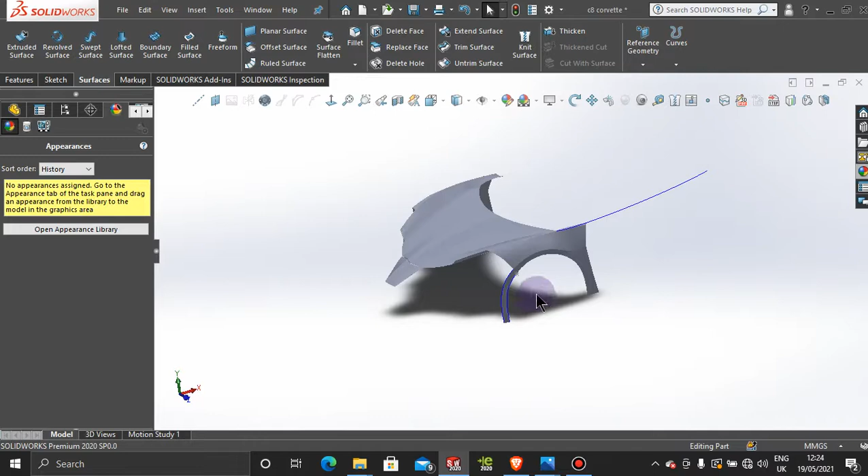In the last tutorial, we created this section here. In this tutorial, we are going to create a water line that goes all the way to the edge here. From that water line, we're going to be able to create this triangular shape all the way down to this point, to this edge.

From this edge, it's going to be very easy to work on these surfaces, and then get it mirrored over to the other end, get the front splitter done, and then moving up to the top part, create a logo, and then we will get to the headlight at the end when we are at the front part of the vehicle.

So let's jump into Solid here and get rid of some lines. Hide this line here, hide this line here, and then jump down to here and find that point. Just hide that one as well so everything's out of the way. There's no points here showing up.

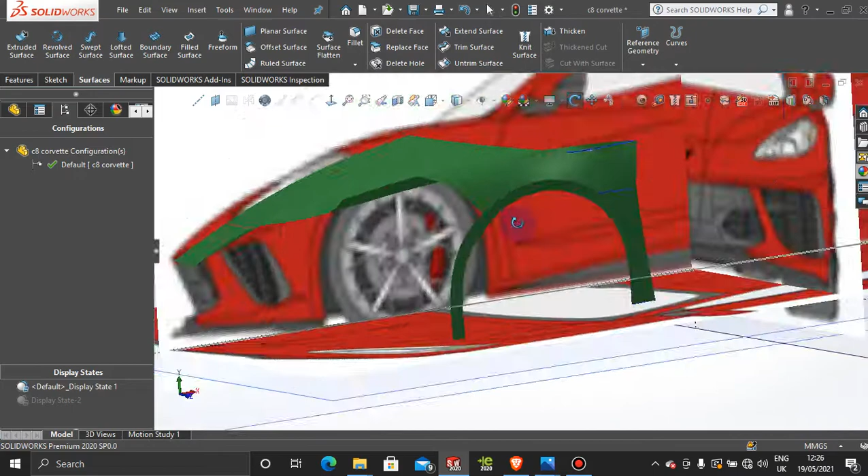So the first sketch we're going to create is, let's have a look. Let's hide these lines here as well. So the first sketch we're going to create, press spacebar.

We're going to grab a 3D spline going from this point to this corner here. But first we have to determine this point here. So to do that,

Let's have a look at a picture here, and let's minimize this picture. Let's minimize this picture here, something like that. It stays with us in Solid, hopefully.

Okay, right. So that line, basically we have that one here, and then that line starts from about here, and it bleeds in and flashes right about there. So we need a point here.

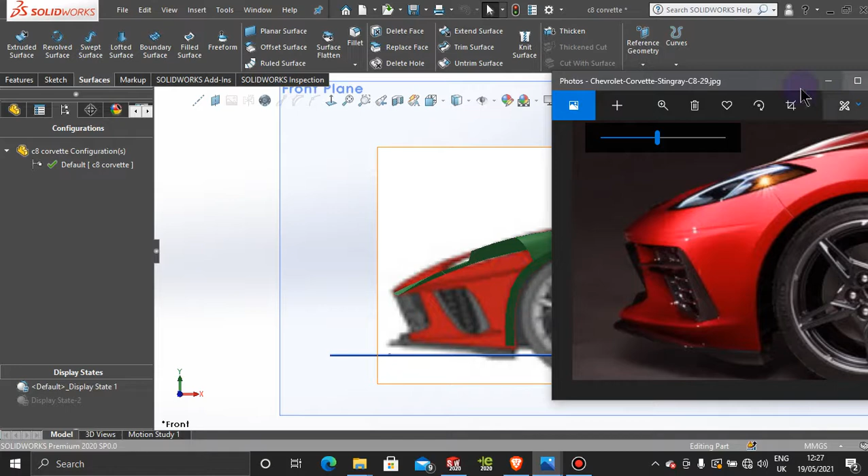So let's make a sketch on the front plane first, and let's add a point here. You can move this point around. Let's put it somewhere here. Roughly.

Let's have a look at that picture again. Yeah, so that's going to be perfect over there.

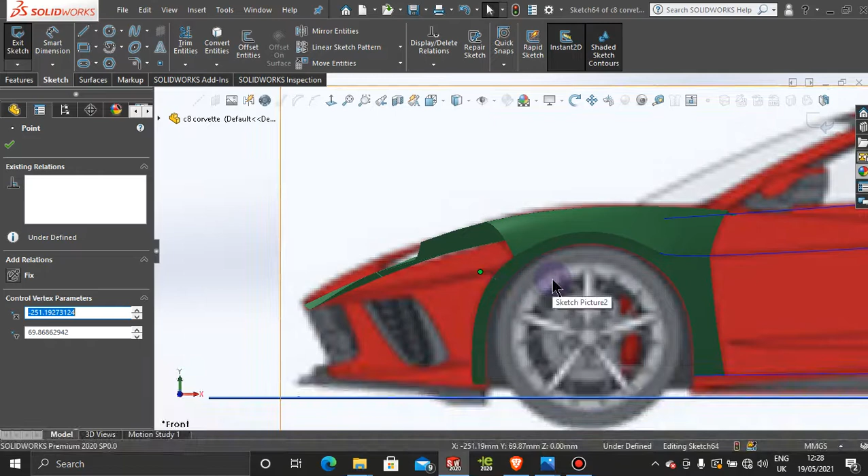And then next thing we're going to do is turn the whole thing this way.

Okay, and then we're going to exit this point sketch and grab onto our 3D sketch, and that is going to be a construction line from this point.

So just press tab to change from X to Y and Z. Okay, so we're just going to pull it out straight to about here.

So that's good. And then let's press spacebar, and then let's pull that line where we want it to be. All right.

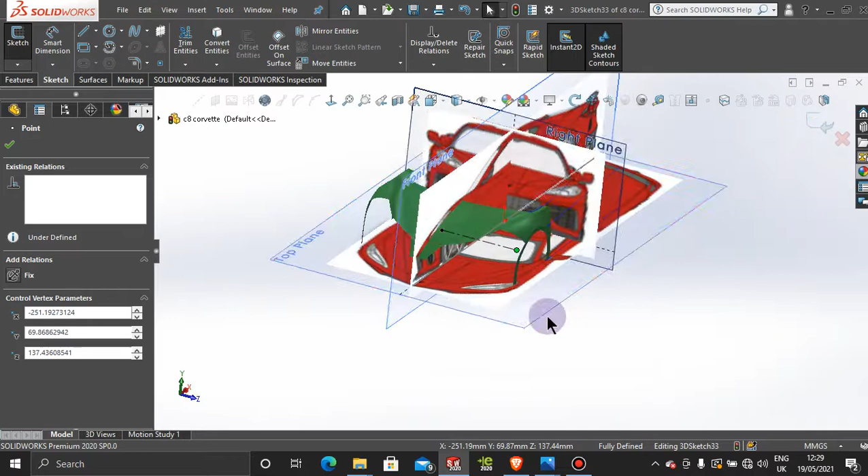Okay, so basically let's jump into our picture here for a second. And once we have that point, let's jump in here and have a look at some of our pictures.

Right, so that point comes in a little bit to be able to create that little bit of flange here, which comes down and then bleeds all together. Okay, so let's do that.

Let's come from the top plane here. Just click the plane and then normal to profile. And that's the edge of our surface, and then

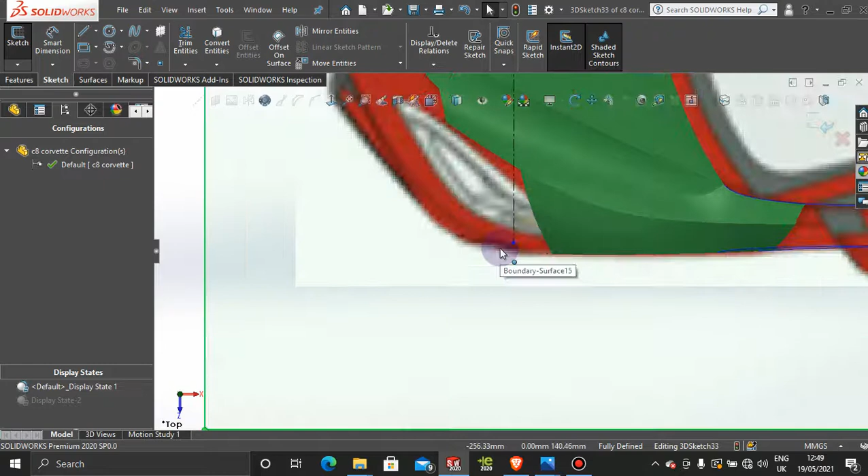Obviously the line will come from here, and it will just bleed into that. So maybe let's bring it a little bit more up, just a tiny bit, about that much. And then once we have our line that comes over here, we do a tangent relationship.

Okay, so now that we have that point determined, let's go and let's add a 3D

3D sketch of our first water line, which is going to be from this edge all the way up to that edge, so this upper corner here, and then

We create the other sketch after. Yeah, so we're going to create this line here, and then we're going to create another line. It comes from the same point, and then drops out. Let's zoom in a little bit.

Hold on a second. Yes, so once we have that point there, what we're going to do is get this first upper edge here.

Let's get that by creating a 3D sketch. So, 3D sketch, spline. And then we're gonna go from this corner here, and we're just gonna go all the way up to this point.

And then we will create a small tangency to that area there. But first let's fix that line here. So let's click on top plane and normal to profile. Let me see if it's still recording. Yes, we are. Let's get the line.

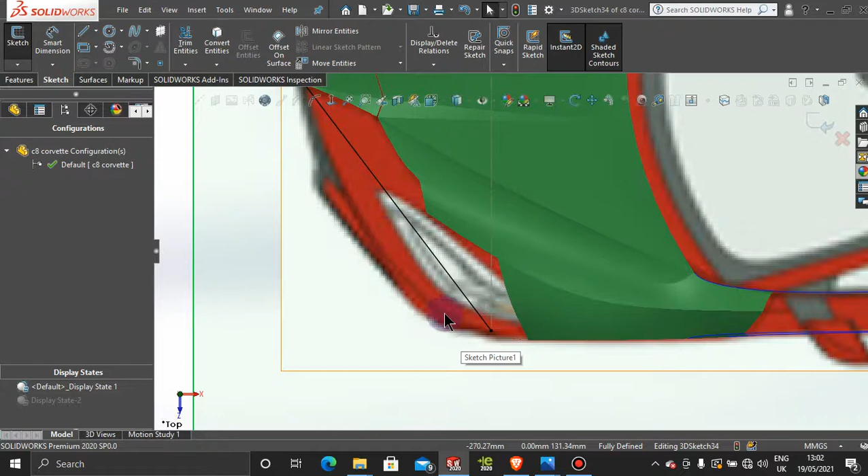So the first one is going to be this line here, not this outer one. That's going to be in here, this line here. We might even actually add a spline point as well. So let's pull it out to here, and then here. Let's pull this to the edge.

And let's add a tangency from this edge to this line. Hold control and then make tangent. Press OK. So now that is the tangent curve. And let's have a look at our spline here, which is looking good.

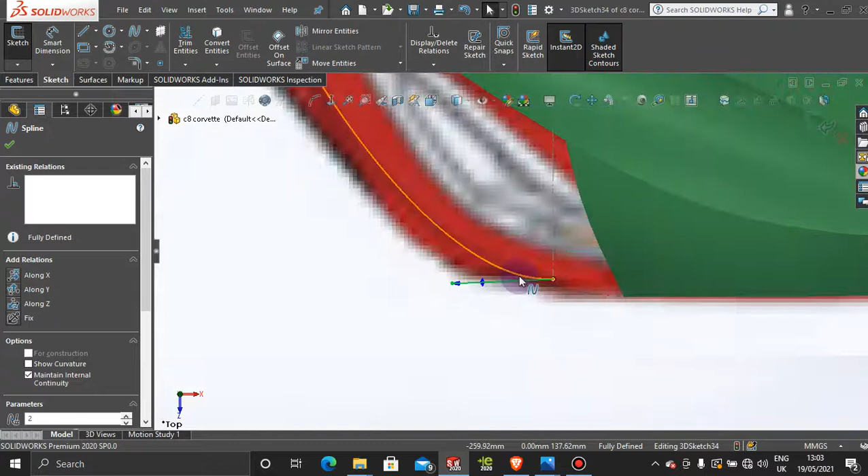Maybe going a little bit more like that. Okay, so that looks good. Let's have a look at the picture. Okay, so that's something like that. Yep, that looks very good.

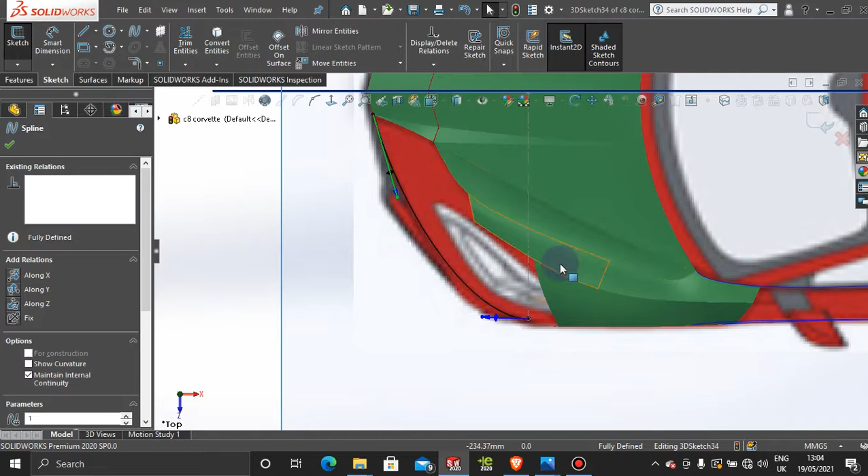Maybe we can go in a little, just a tiny bit more, and then let's see. Yeah, perfect. So yeah, just manipulate it as far as you're satisfied with that curvature.

Let's go from the... let's have a look at from the side. So front plane, normal to profile, and let's bring that line up. Actually, let's get that. Let's get the tangency out. Delete now.

Okay, so we can get to our curvature as it should look. Something like that. Okay.

Let's have a look at our picture. Which picture should we use? This is the picture we want. Okay, let it load up. Okay, it's a very high resolution picture actually. I'll come out here and bring the picture back.

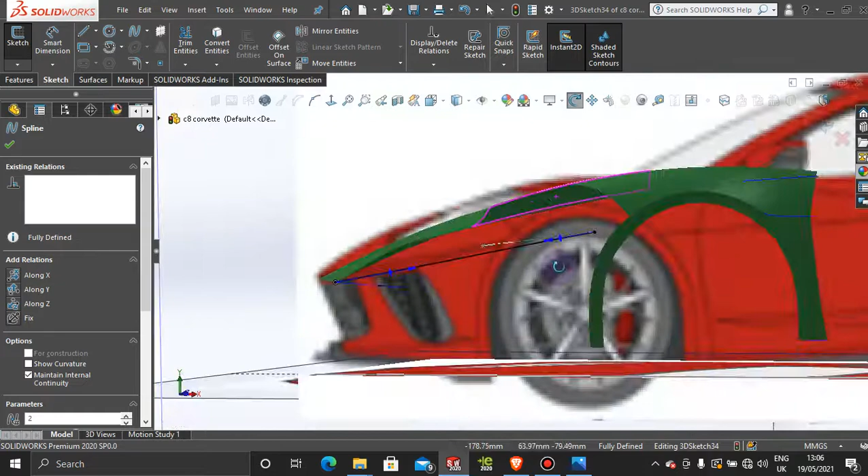Now let's come to the top view, to the front view here, and click on that and press normal to profile, and jump in here real quick. And then let's just bring it to where we want it to be.

Next thing is click on the picture here and bring the picture down to about there. Don't worry about it, you can bring it down. As we're not really going after the blueprint, we're more going after the pictures that we have, so having this picture sitting here is a much better option.

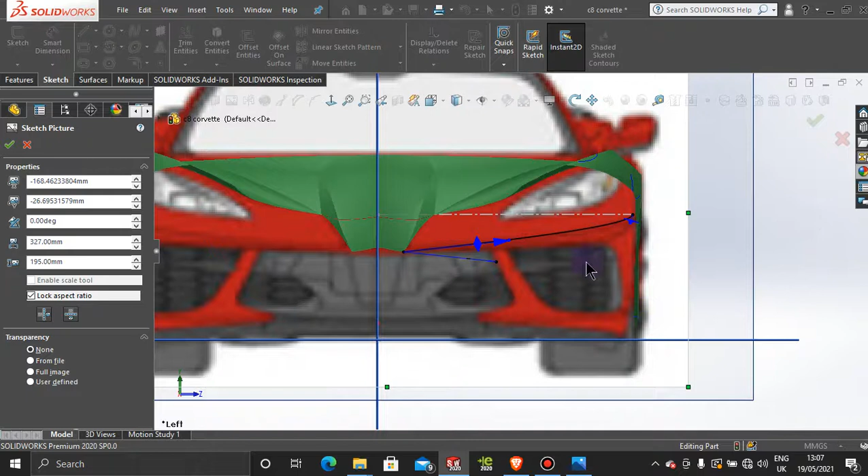Okay, so let's come in here again and then see that curvature, and then let's exit that, and then let's just see this line here, and then see this handle, and I would say that's a good curvature from this view.

All right, so let's have a look again from the top view just to make sure that everything is in line and as it should be. And let's have a look from the front. Normal to profile. That still looks good. That's good.

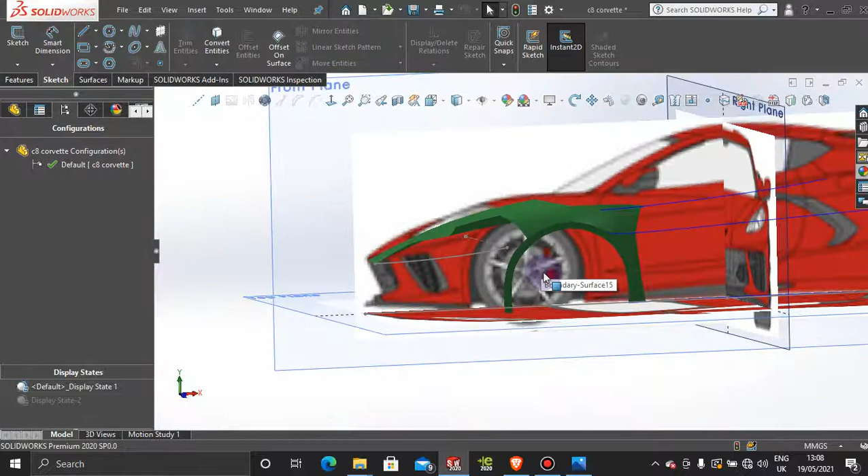Okay, and then now let's add our 3D spline here, and that 3D spline is going to go from here straight all the way up to this point here. So let's go to 3D sketch and then grab a spline, and then we're gonna go from this point to this point here, exit the sketch, and then we want to be tangent with this line here. Let's make that tangent. Actually, you don't need to be very straight.

Let's go back again to 3D sketch, add the spline back from this point to that point. Well, not there actually, let's delete that, and edit from here. So spline from this point to that point, and let's click on this line, hold control, click on this line and make tangent. Yes, now we're tangent.

Okay, and then let's come from the top plane here, and let's click on this line and just take a little bit off from the tangency in this area. Let's have a look at the picture, how much tangency we have on that one. Not much, it's pretty straight, so that would probably be enough.

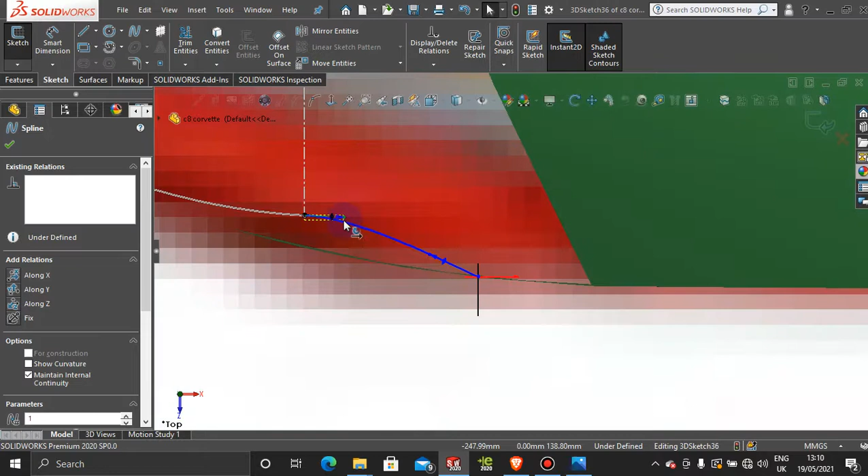So if we pull it down a little bit, bring that up over here, and of course we can always change that sketch if we're not happy with it. Okay, so let's keep it as it is on this sketch.

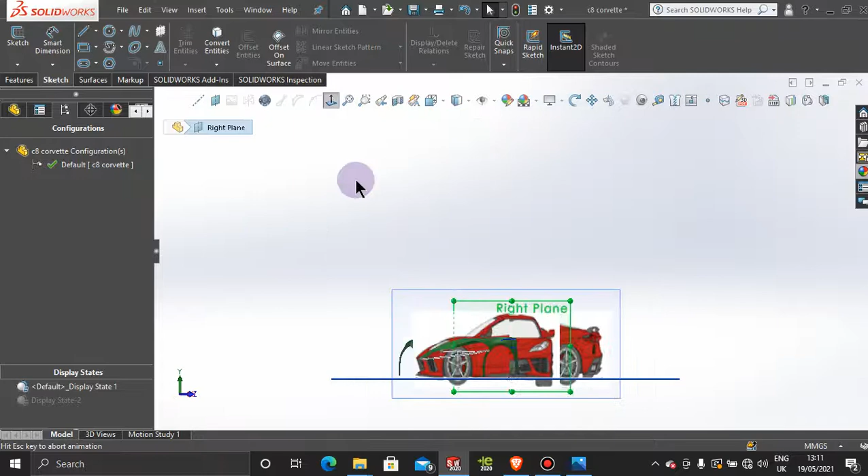And then exit this sketch, and let's create our second sketch. Let's come to the right plane here, just click on it, normal to profile, and then we're going to grab a 3D sketch construction line, and come from this line straight down to about there.

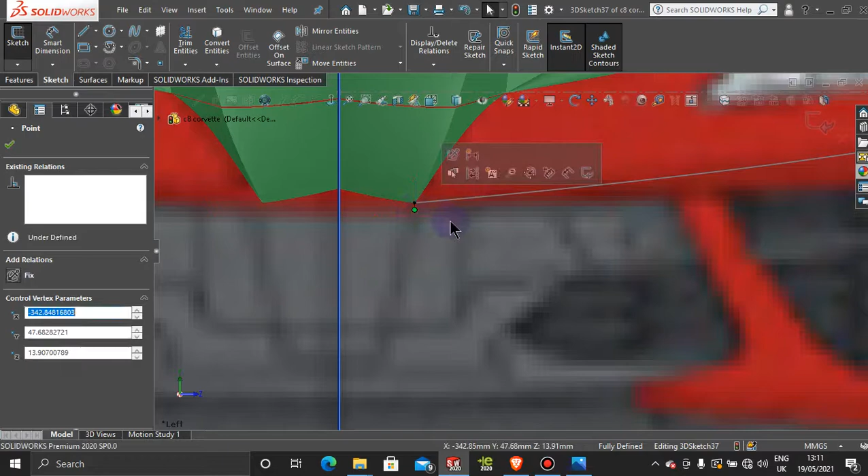And then yeah, let's bring it a little bit more up. Don't need too much on that one. Okay, so that's the first one.

Okay, and let's have a look at the picture again, and then our second sketch. I would say we're going to do the same thing on the second sketch. So we're gonna come over here from the right plane, and this is our line that we determined, and then we're going to exit the sketch.

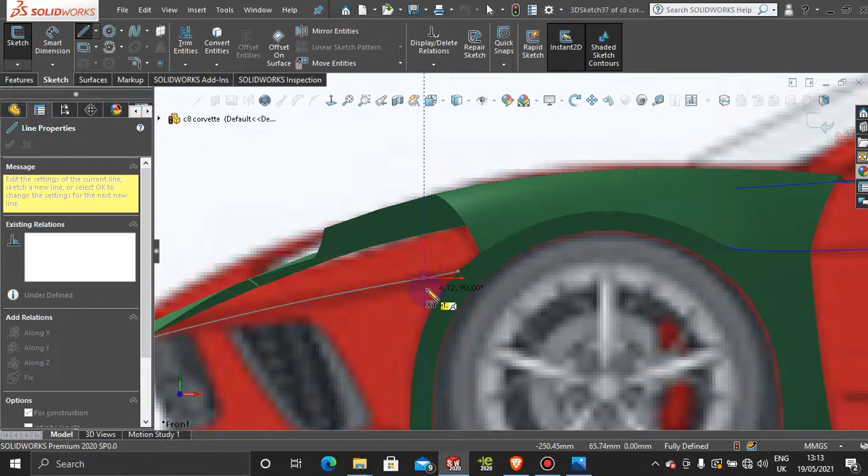And then let's grab another 3D sketch with a construction line, and we want to snap on that point, just press space bar, and then Control Z to get the line off. So let's grab that construction line, and we're gonna come down to about that much. Of course, we put it there.

Okay, so again, let's grab a center line, and then we wanna be on the XY plane. XY plane, that's fine.

And let's measure these lines here. I want to make this water line the same size all the way around, so let's grab the measure tool, and that's what this measurement is, 1.27 millimeter. Parameters 1.27, let's make it this one. Let's try 2, or let's try 1.5. 1.5 looks a lot better.

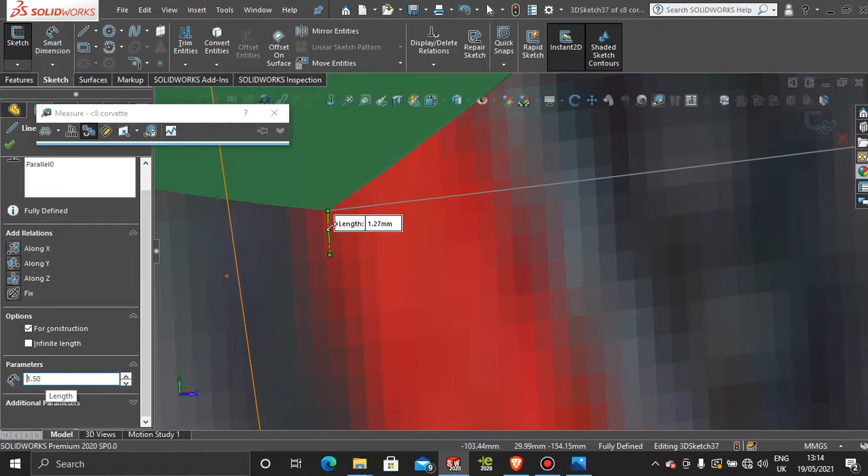And then let's measure this one here, and exit this measure tool, then jump back into the measure tool, measure this one. This one is a lot longer, so 1.5 on this one as well.

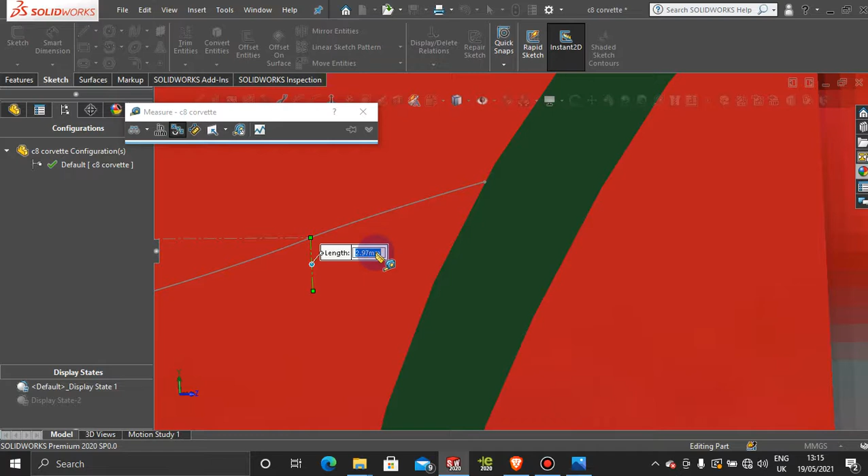Okay, we're gonna keep it as it is, and then see what we can do with this next spline that we're going to create.

Okay, so let's grab again our 3D sketch, and that's going to be a 3D spline, and we're gonna come from this point to this point here, and then the same thing basically what we did on the other one, except this one is going to be a little bit different.

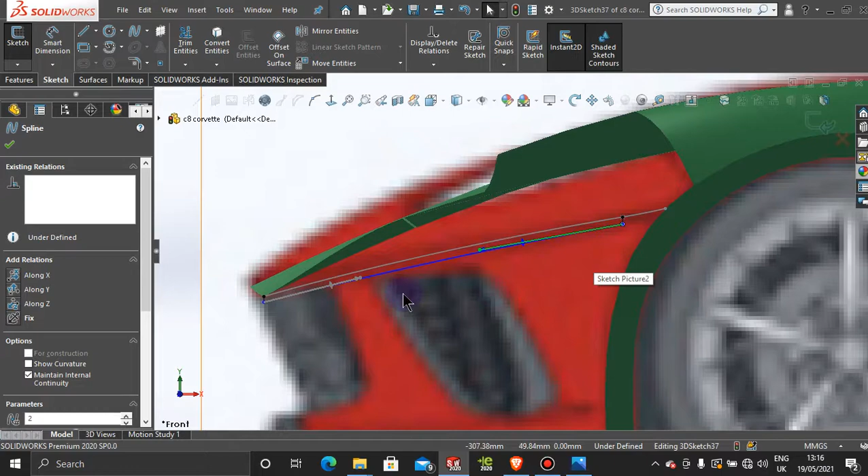So let's give this a nice profile close to the other one that we created. I'll bring this line a little bit up, something like that, and then let's try to be on the same curvature as that one. Okay, and now let's come from the top here.

So as long as you're in the 3D sketch, and you're just turning the model around, you can manipulate your curvature. So our next curvature is going to be flush with this one, but then it pops out here and comes in here as on the picture, as you can see. This is the pop out that we are looking for. It pops out, but starts to get flush at this point.

Let me bring up this picture here. Let's bring up this picture. Okay, so let's zoom in on the front of it.

Yeah, so it pops out a little bit. As you can see, it starts to get flush here, and then it pops out and comes in. All right, so let's go after that one.

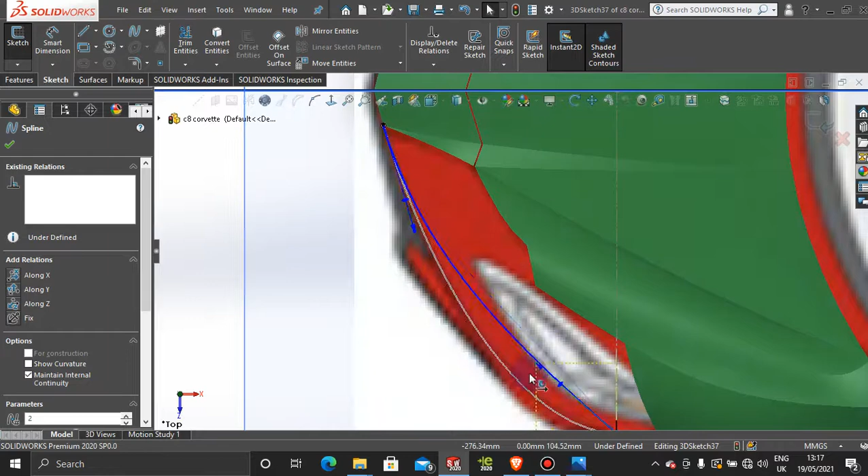So let's click on the spline so we can have these handlebars, and then bring them how we want them to be. It pops out here and stays flush on this edge here.

We need to add a spline point somewhere around here. So let's add that spline point. Insert spline point, and let's add the spline point here. Okay, exit the spline point and click on the empty field, then click on the spline again and press display control polygon.

And now we have all these four connectors that we can work with. So let's pull this out to about here and pull this down here. As I said before, it's flush with the other one, and it starts to pop out from the flush right about there. We just make sure that we manipulate this one as it should.

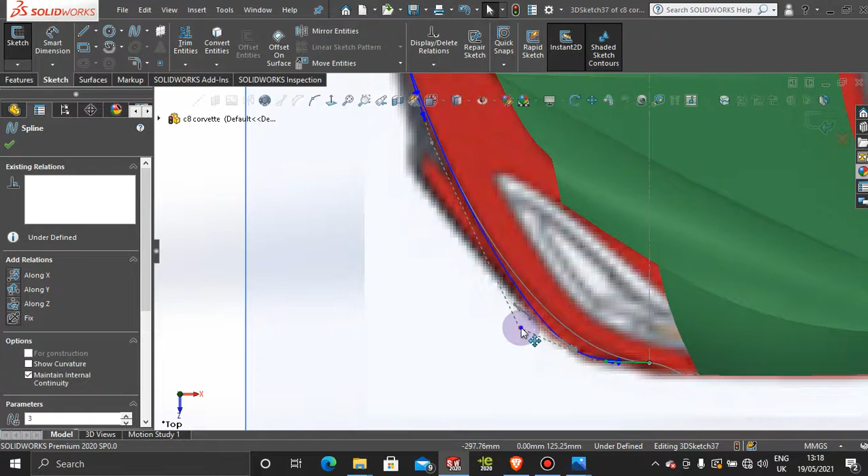Let's bring it a little bit more, and then okay, let's go back to that one here and bring this down a little bit here and here. So yeah, it's flush and it's starting to pop out right about that point.

Okay, so that looks good from there. And now let's just double check from the front plane, normal to profile, and it's not flush as you can see.

So let's grab on those connectors that we have, these yellow triangles, and make sure that our spline is tangent to the other spline.

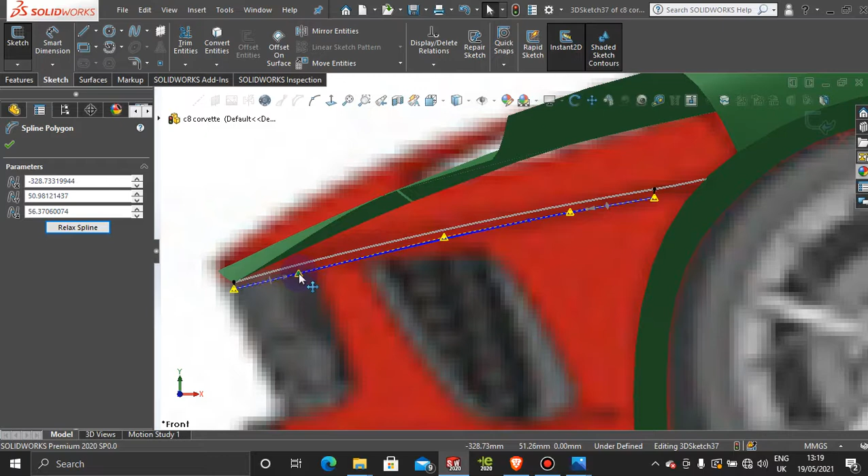Don't worry if the blueprint is not coexisting with the spline, because we're going after a picture and we can move around our blueprint. So something like that. You can always use curvature combs to get this as straight as possible.

Okay, that looks good. And then let's have a look from the front. So there's a few ways you can move around your object. Either you press space bar and hold middle mouse button down, and you can have all these views, or you can just click on a plane and normal to profile, and it drops you where you need to be.

Okay, so let's have a look again from the top. Basically, double, triple checking is always the best, because then you know for sure that your spline is how you want it. As you can see, it's not flush here, it goes below that one.

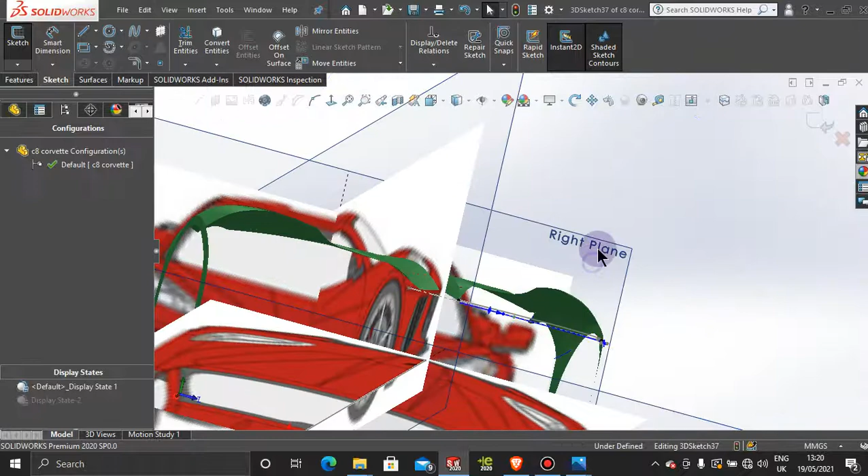That's okay, so now that's fixed, much better. Let's have a look from the front, from the top. Top looks good. Let's have a look from the front here, normal to profile, flip that around, and then that looks good on that section as well.

Okay, so after that one, let's exit the sketch. Okay, and then have a look at our picture here. As you can see, this corner here, when it gets to this end here, it gets quite close to each other. So we're gonna go with something like that.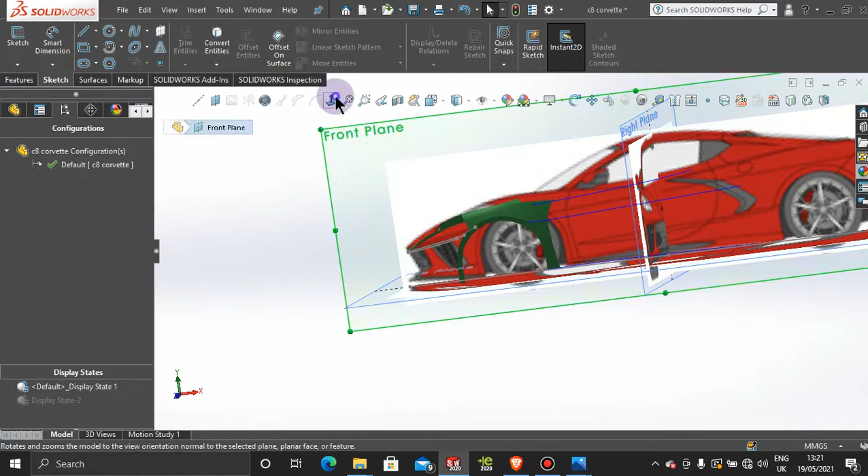Okay, so let's jump into the front plane here, exit the sketch, front plane, normal to profile, and let's bring that line up a little bit so it's closer to that one.

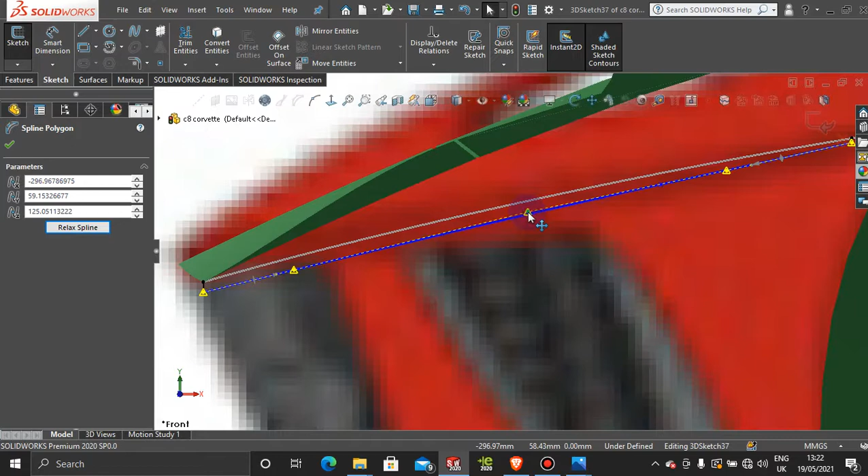But now we have to fix up our curvature. So again, just fix up the curvature as much as possible as you can. Play with it as much as you want. I mean, when it comes to surfacing, surface design, you're going to play with curves a lot, because the curves are determining your surfaces. So it's important to get them as good as possible.

Again, let's have a look from the front. Just a tiny bit up. That looks good. And now let's have a look from the top. And that looks perfect. Okay, so yeah, of course.

So the next thing we need to do is create this curvature here. So let's grab a separate 3D sketch. It's going to be a 3D spline, and we're gonna go from here, from there up to this point here, that edge.

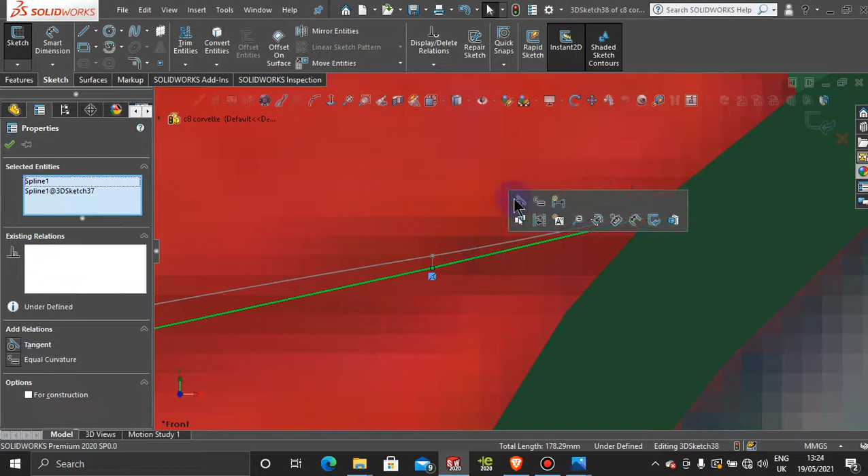Okay, so let's have a look from the side view, and then we're going to add a tangency. Hold control, press that one, press tangent. Okay, and then that looks pretty good to me.

And then if you look at, let's look from the top, and we just need to pull it to where the other one is.

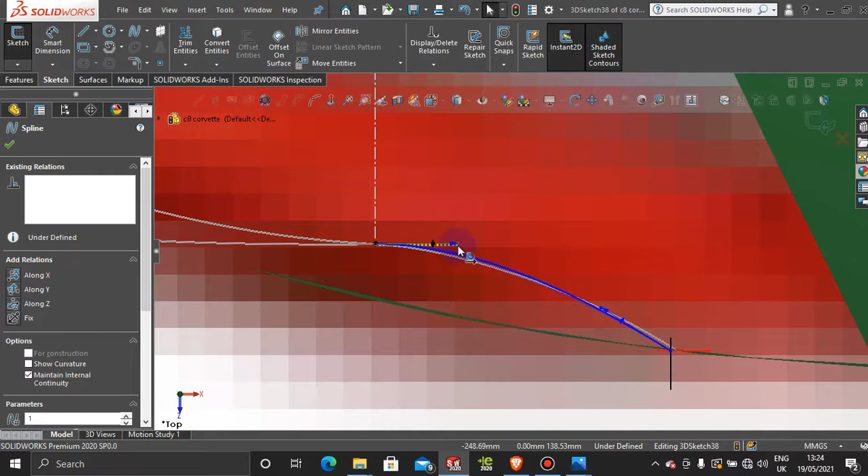Get there, something like that. Pull this a little bit out, somewhere in the middle. Okay, that looks good.

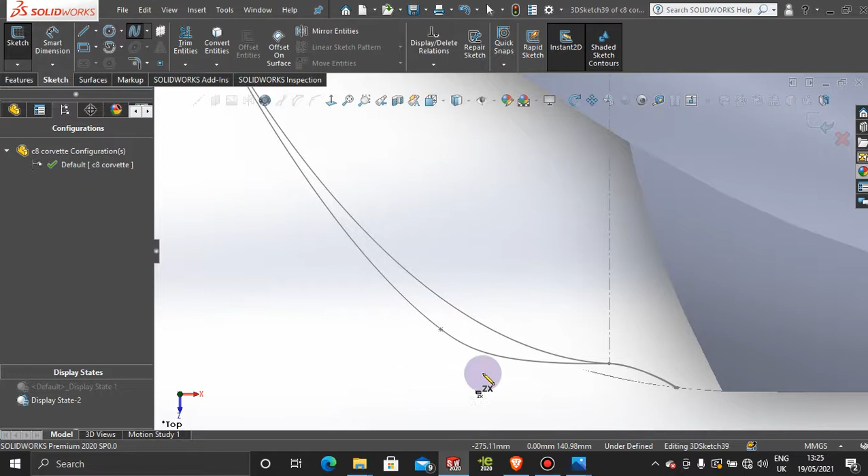So exit the sketch. Now basically what we want to do is jump over our second display state here, and then add a 3D spline. Let's go from the top, and we're going to add a 3D spline from this corner, from the straight, the widest point inwards. So let's go to 3D sketch and grab that spline, and go from this corner all the way to this edge.

So let's jump in here and manipulate that spline that we just made. The best way is to jump to the back view here, turn it around, and get to that spline in the best possible way so it's straight. I would say this is our straightest point. Maybe if we get the connectors of the spline hitting the edge, we get a better spline, moving things up or down.

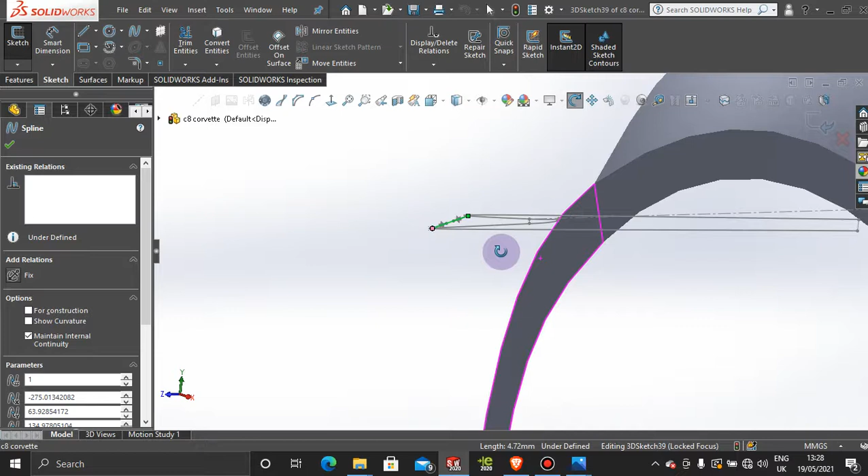If you get it somewhere in the middle, okay, then click on this spline here, and as we said, let's just turn a bit. Yes, now we're okay. Oh, hold on a second. So we want to be in the middle as much as we can on that section, and we want to get those two points to be at the very edge. It depends how good your mouse is — I lost my trackball mouse, but a trackball mouse is usually the best. Okay, that's maybe the best we can do here right now.

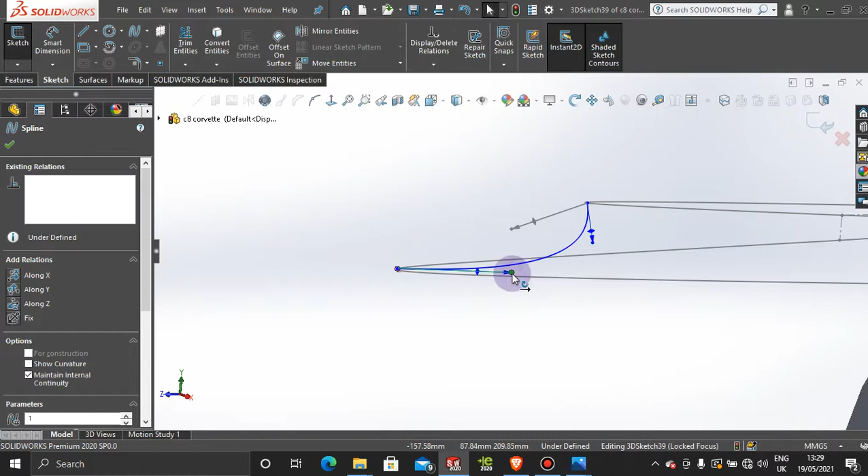So as we said, we have a straight line coming in from this angle, and we have a curvature in this area, as you can see. So that curvature, something like that, and then a straight in. We could add a spline point here, but that would make it very sharp, and there's not much sharpness there. Let's pull in a little bit more and get flush with that, so we make sure we're not falling below that one, those two lines.

Okay, that looks good to me, so that's going to be our first profile. And as we talked about, it straightens out somewhere about here.

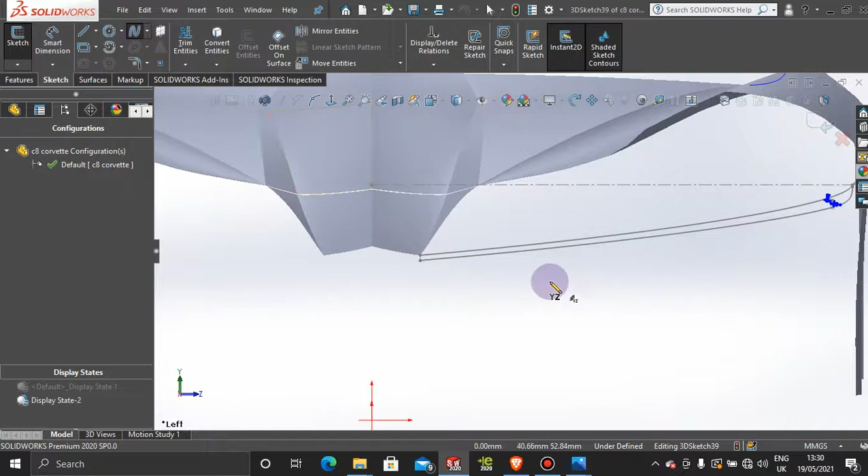So we're just going to press spacebar, get to the front of this whole thing, and grab a spline. And then we're going to grab a spline from here to here, and add a little bit of profile to this one, just so that we don't have any warpage. Just a tiny bit — that's about it, okay, that's good.

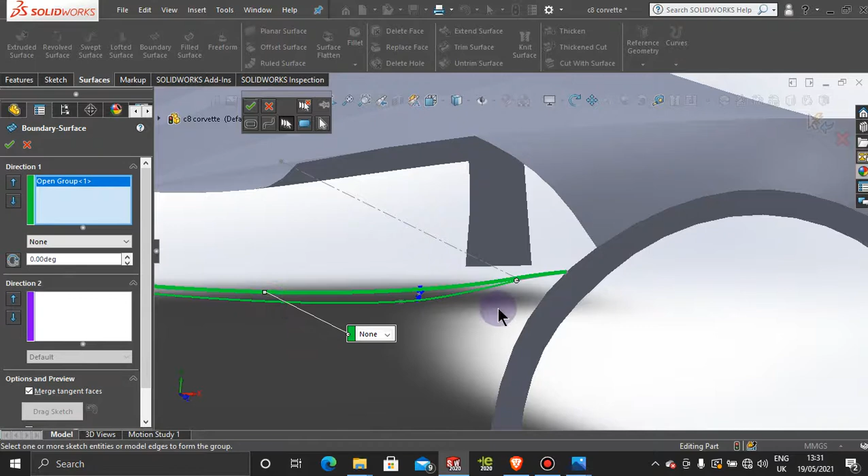And then now we're going to try and do a surface, a boundary surface. So let's grab the selection manager with the right click and select this line and this line, then press OK. And then again, selection manager, select this line and then this line, press OK. And then let's flip these connectors — stay on one of these connectors and say flip connectors. Okay, so now we have the surface there.

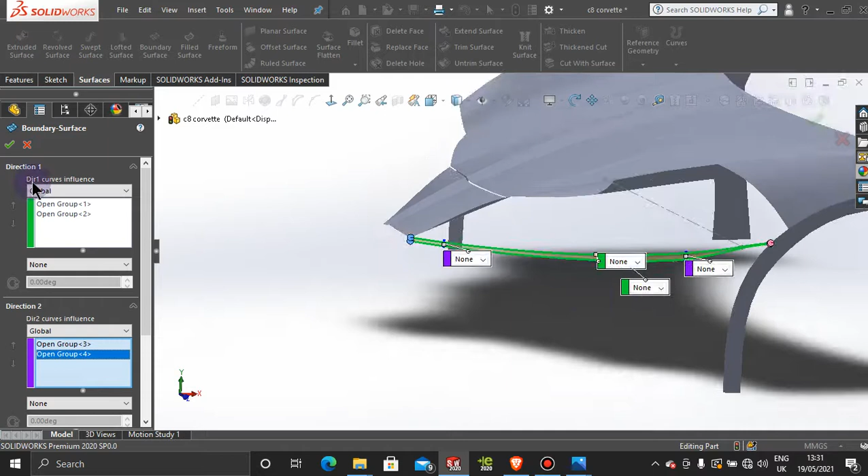So all we have to do now is add our profiles. Direction 2 is going to be our profile number 1. And then another direction here, so the curvature doesn't go all the way to the end — it's going to be this profile here. I straightened it out, and it starts to curve in at this point. Okay, press OK on this one and see what surface we have. Our surface looks good. Let's have a look from the top.

That looks pretty good. Okay, come in here and have a look what we have here. That's touching where it should be, touching its course, that water line.

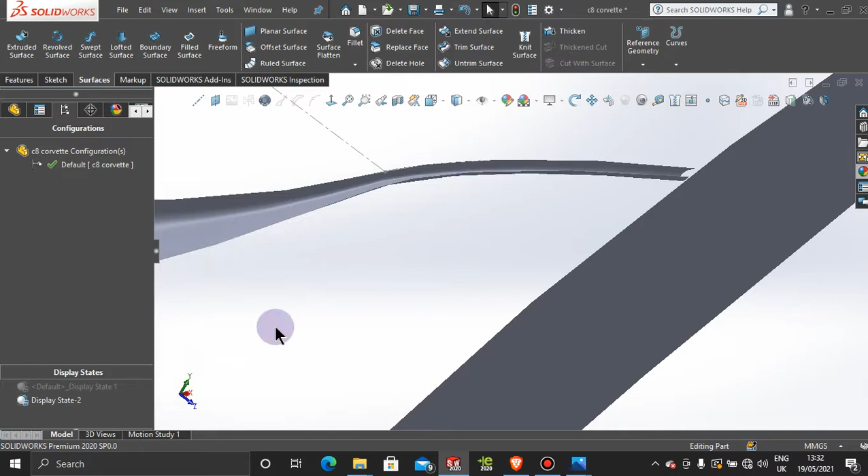So let's help that. Let's delete this boundary surface here and go to our sketch. Let's create a separate sketch from the side view here.

We want to straighten it out somewhere around here, so let's go to a 3D sketch. Let's grab a spline, grab it from here to here, and then let's add this small spline, a little bit of profile as well.

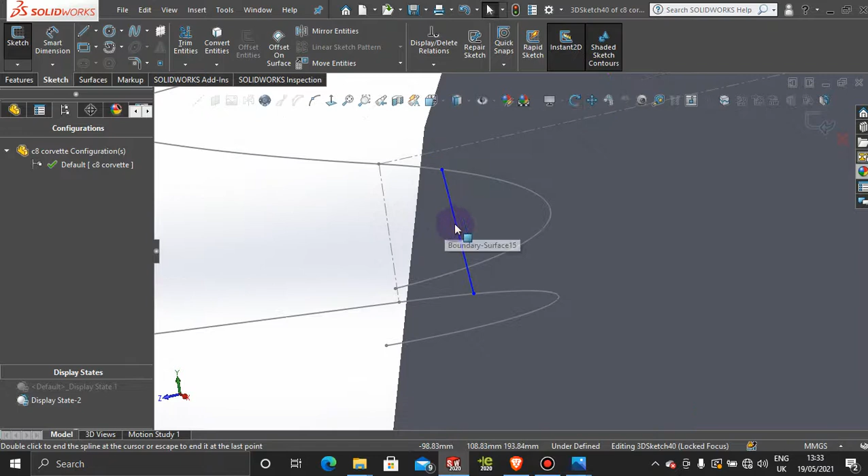We're going to bring it inwards, something like that. Okay, so now let's have a look what surface we get this time.

Exit the sketch, then go to surface, boundary surface, selection manager. Let's choose this spline. Press OK. Selection manager again with the right click.

Select this line and this line. Press OK. Hover over one of these connectors, right click, and flip the connectors.

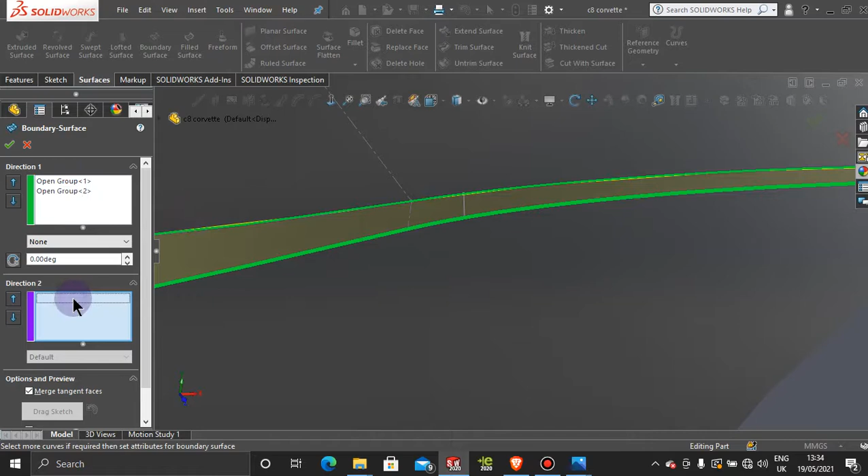Our direction 2, the first one is going to be this one here, the second one is going to be this one here, and then our third one is going to be this one here.

Press OK on that one, and I want to see if this one registered. Spline here, it did. Press OK on that, and now we have a lot better surface to work with.

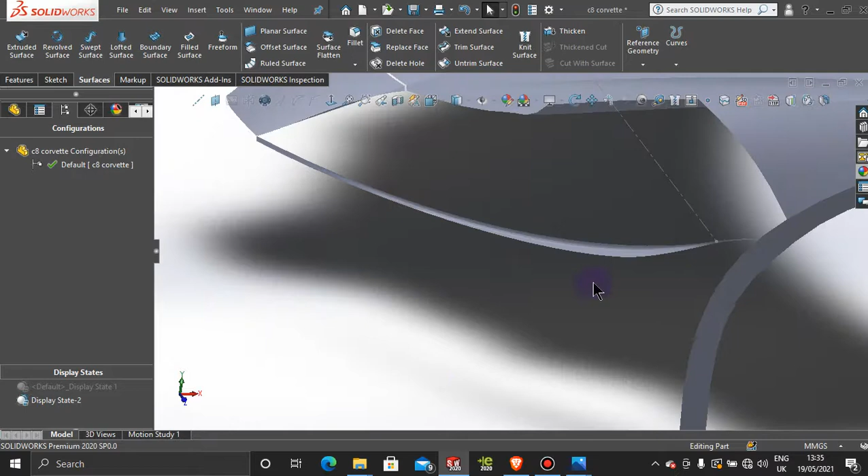Our curvature does stop there, bends in here, and then stops at this edge, so we can knit everything together as we should. However, we can maybe make this straighter, so we'll see how we get with that one.

We're going to create from this corner here all the way up to this corner, which wraps around into that small surface here that comes in and out. But first we have to determine this point here. Okay, so let's do that.

Before we go any further, make sure you save. Let me have a look—it's still recording. Yes, we are. Okay, let's bring in the first display state here quickly.

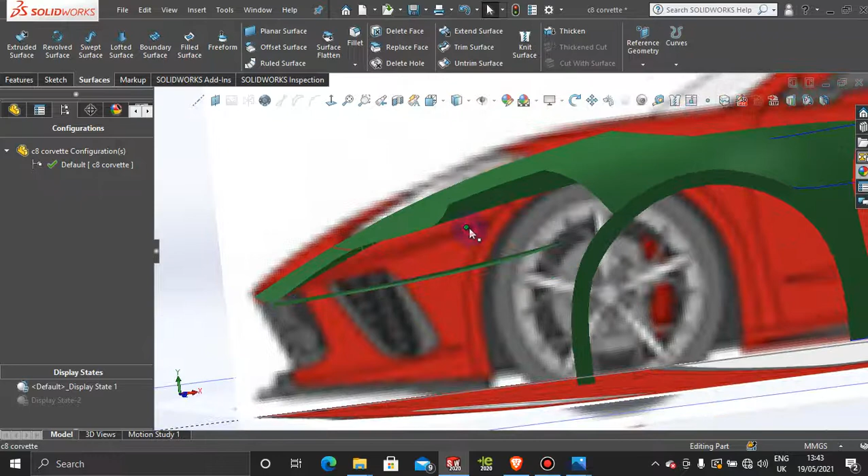Let's just hide some sketches that we're not using, so let's hide that one as well. All right, that's good. Now we need to determine that point.

So let's make a sketch on the front plane, normal to profile. And then we're going to make a sketch here.

Grab a spline and sketch from here to here, then bring the spline up, something like that. Okay, so that's one, and then exit the sketch.

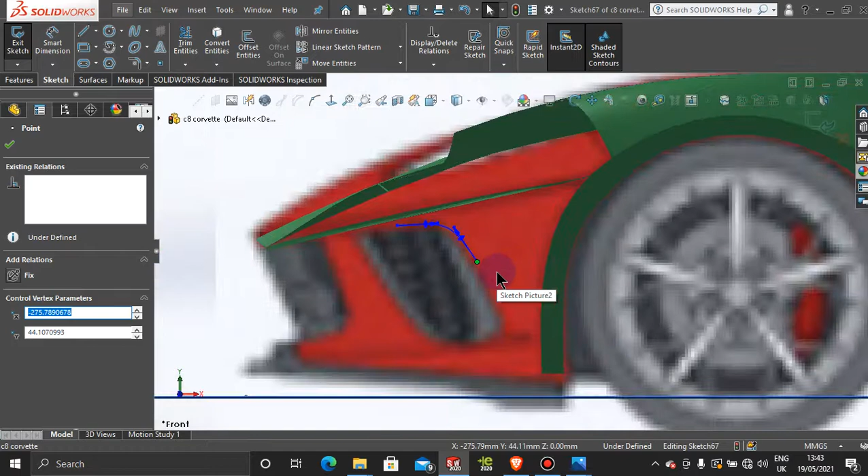And the second one is going to be obviously this line here. So let's sketch on the top plane, normal to profile. Because it's almost flush with this line here, we're going to convert this edge.

Press OK, and let's just pull it all the way back here like that. Exit this sketch and exit this sketch. Then let's do projection curve, sketch on sketch.

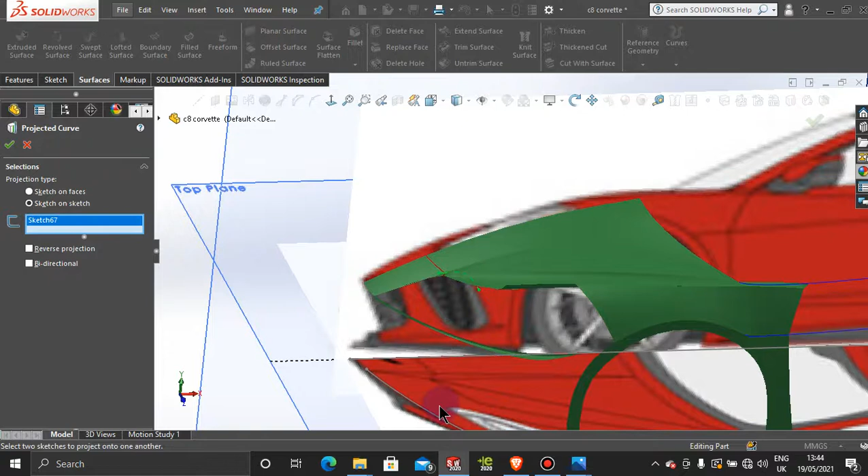Make sure you have that selected. Select these two lines and then press OK. All right, so now we have that determined, so we can work with that and add our point on that surface there.

Okay, let's go to second display state just to check. Okay, let's jump into the first one. Let's click on front plane, normal to profile, and that line is right where it needs to be.

So the line that we're going to create is going to come somewhere around here, and then we're going to come all the way down to this area and then into this area here.

So let's add a 3D point on that sketch. 3D sketch, 3D point, and let's add that point somewhere around here.

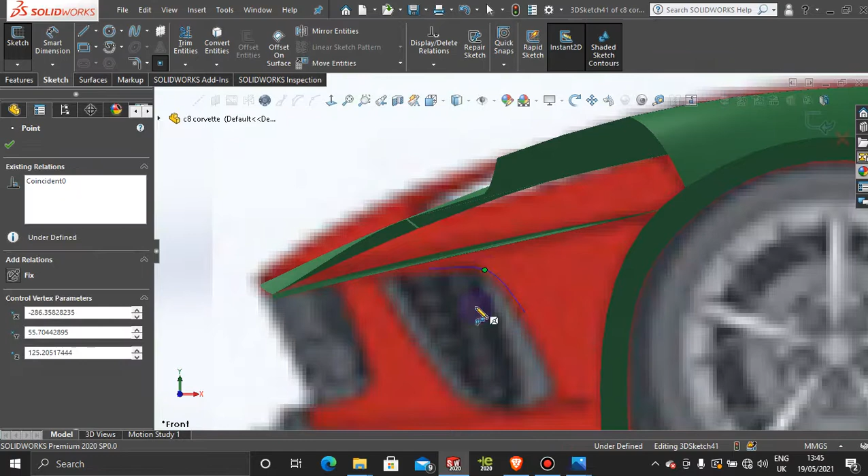Exit the sketch. The next thing we need to determine after we exit the sketch is click on front, normal to profile. We need to make a sketch that goes from this edge, something like that. So let's grab a 3D sketch, and this is going to be a construction line, a center line. Let's go from this edge and go all the way up to this point here. As we can see on the picture, let's zoom in on that area. That line is not straight down but straight in. We will add chamfers when we have the surfaces done.

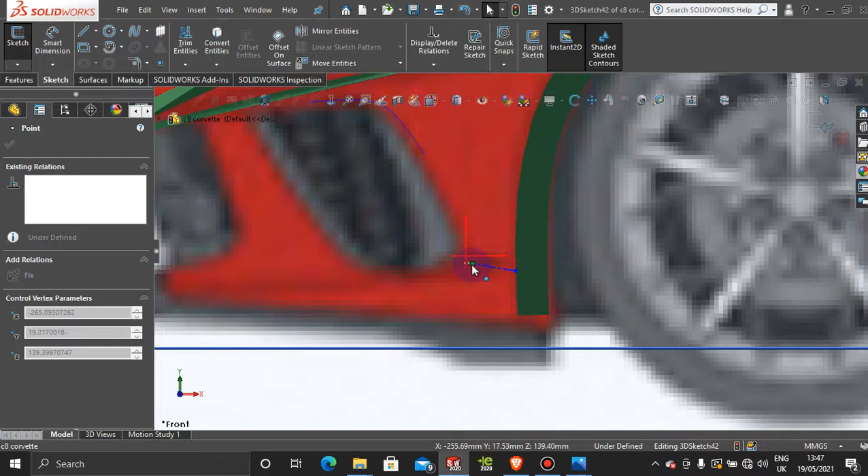So let's come to this sketch here and then pull it where we like that to be, and somewhere like that, and something like this. Okay, and then now we just want to get on the top plane here quickly.

Press normal to profile. Let me see if we're still recording. Yes, we are. And we want to make this line perpendicular to this edge. So let's take this point and then just pull that line in if we could.

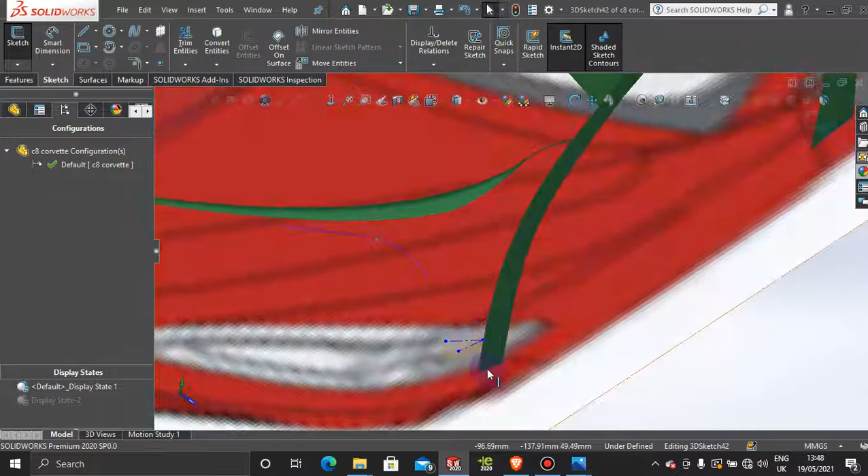And let's edit the sketch. It won't let us turn it that way. So let's grab another spline, center line, and make it from that point perpendicular to that line there. Exit the sketch, and let's have a look at our point there. And let's delete that one.

Let's go back and maybe bring it a bit more out because I think it's a bit too sharp. And it goes here. No, that's actually good. Maybe it could be a bit smaller. Oh, let's have a look from the side. So click on the front plane, normal to profile, and now we can move it. Okay, so that's good.

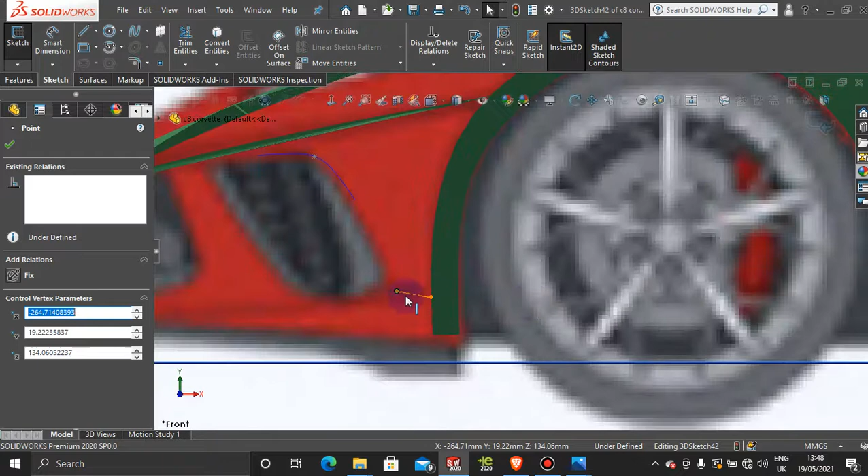Somewhere here, just add a little bit of something to it. So let's have a look again from the top view, and we are still in good shape. Okay, so let's exit the sketch, and now we have these lines. We have these points determined.

Let's jump in here and then grab a 3D sketch and a 3D spline, and we're gonna go from this edge to this. Well, let's add a few points here. Maybe here, here, this point here, and then this point here. Okay.

Now all we have to do is just fix up this curve, which is going to take a little while. So let's have a look from the top, from the front here. Okay, so click the line and press Control Polygon and grab one of these connectors so we can pull it into shape.

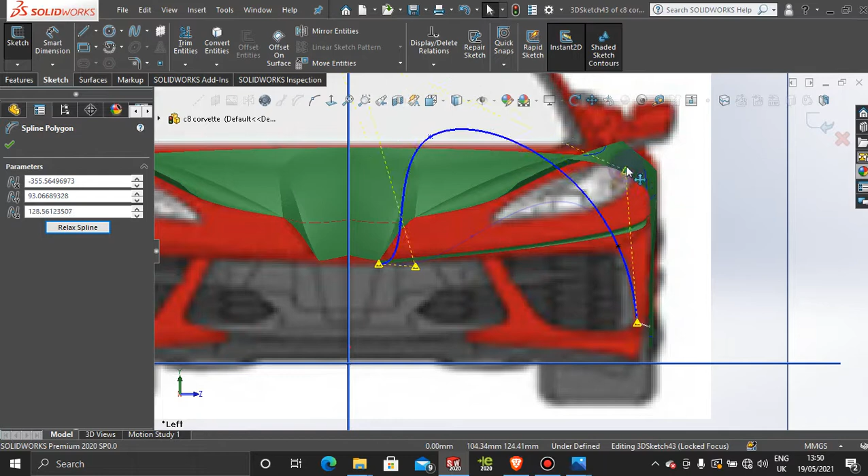Put this down here. So this connector here is a bit too high for us, and this connector here is a bit too high for us. And then let's pull that down. I have it. Okay, so just play with this line as much as you want, so it will come down like that.

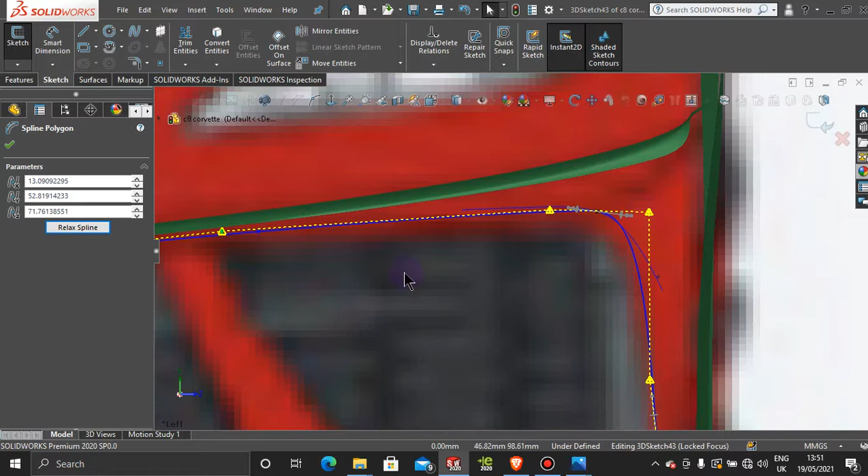We will hide this line in a minute, and then let's add this the way it should look. So like that.

A lot of people are using freeform in creating surfaces in SolidWorks, because in SolidWorks 2020 now you can indeed use freeform. So why not? Try it, see if you like freeform. I'm not a big fan of it. I like to work with splines and then surfaces.

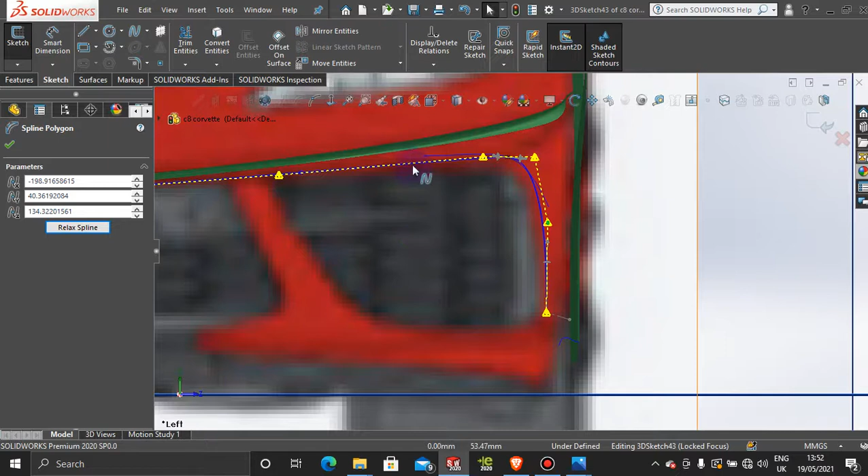Okay, so that looks good to me so far from this angle here. And let's have a look from the top. Of course, it's like that. And let's grab that connector and just pull that there. And then, of course, the line is flush with our surface.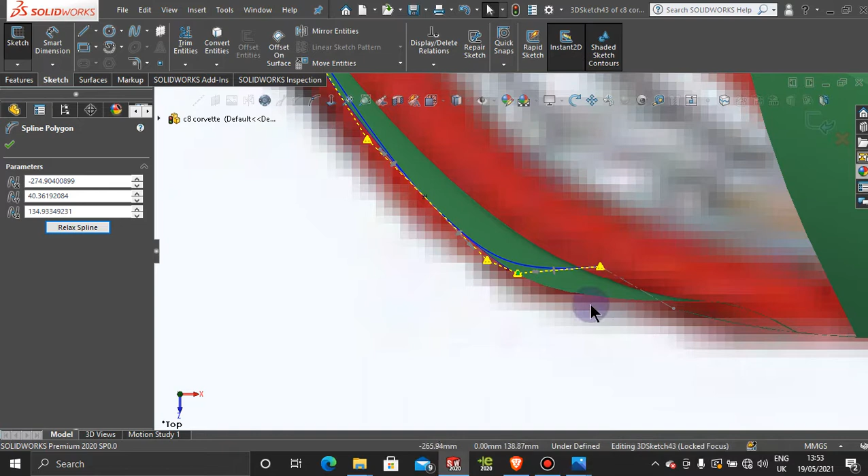So let's have that line as well. Fix it. Let's pull this connector where it's supposed to be. And that's good there. And then, yeah, so basically it needs to be flush with the edge of this edge here. Let's have a look at the picture again. Okay, so that line. Okay, yeah, it's flush with the other surface all the way. Okay,

and because it's coming from that angle. Okay, so let's go to top view here again and come over here and make sure that we are flush with that edge, that green line there.

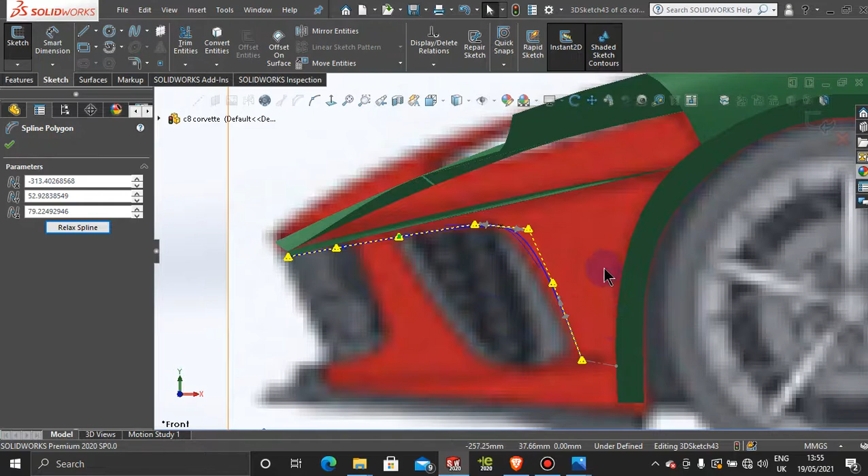Okay, something like that. Now let's have a look from the side here. From the side, it looks pretty good. Maybe we can just bring it a little bit up, like that. Bring it a little bit up this way. Okay, that looks good. And again, triple and double check always.

Flip around. That looks good from here. Maybe we can bring this in a little bit more. That looks good, and let's have a look again from this angle. That looks good from this angle as well. We can bring this line in, but we're not going to. And that looks good there as well. Okay, so far we looked at it from all angles.

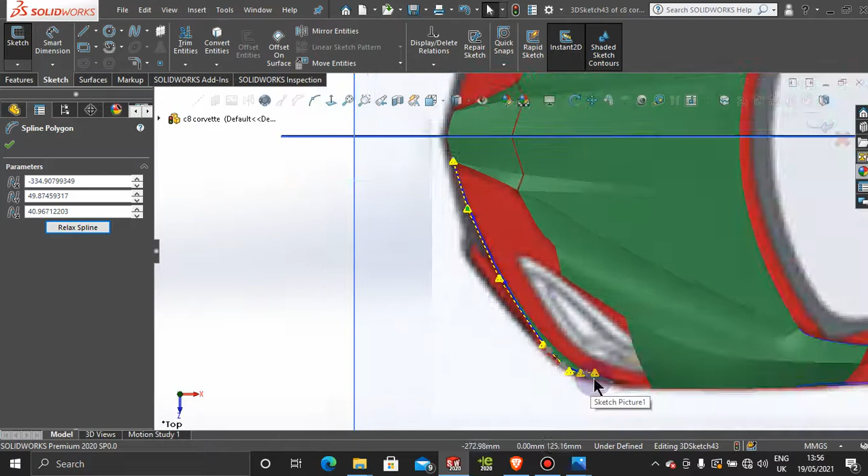Let's have a look again from the top view. And yes, you can see we moved it a little bit. So let's pull it back out to that edge. And that's why it's good to always double and triple check as much as you want. So again, once you manipulate in one place, just go through all around, and that looks good here.

And let's have a look from the front again. Okay, let's have a look from the front. Front plane, come on, grab the front plane, not the right plane, and then normal to profile, flip it around, and that looks good here as well.

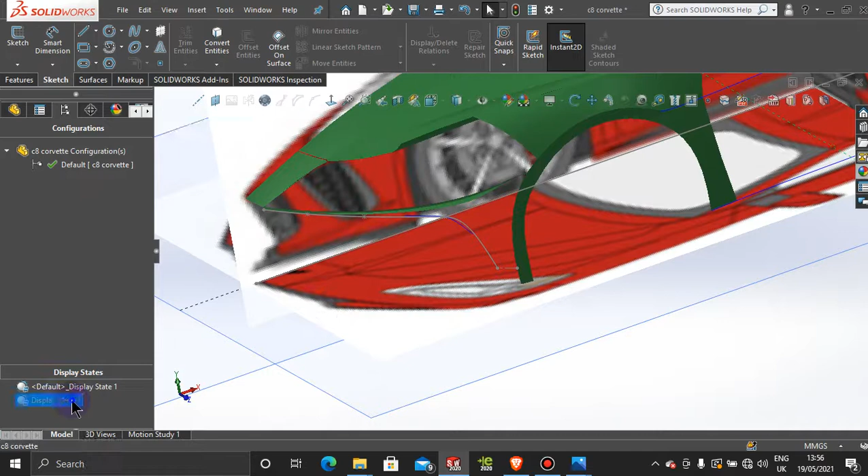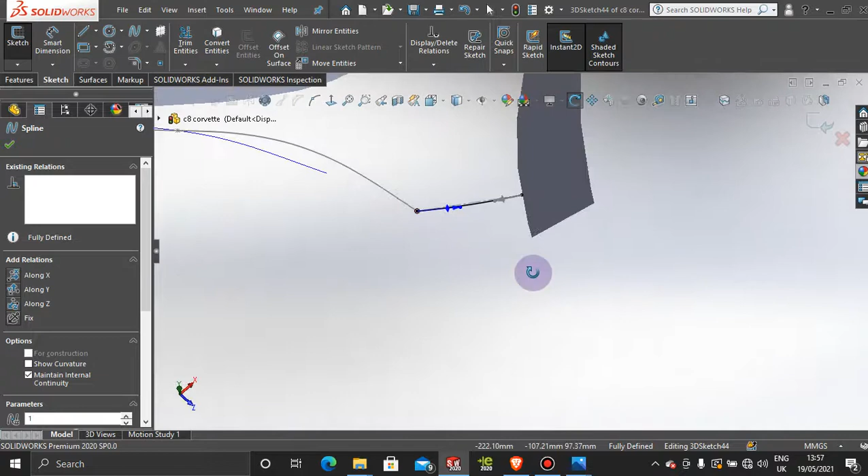Okay, so now let's jump over to our second display state, and then what we're going to do is add a 3D spline onto this construction line. So let's go to 3D sketch, 3D spline, and then we're going to go from here to here, and then we're going to add a little bit of profile to that. Okay, just a tiny bit of profile, and just pull it out, something like that. Don't need much. Okay, and then exit this sketch.

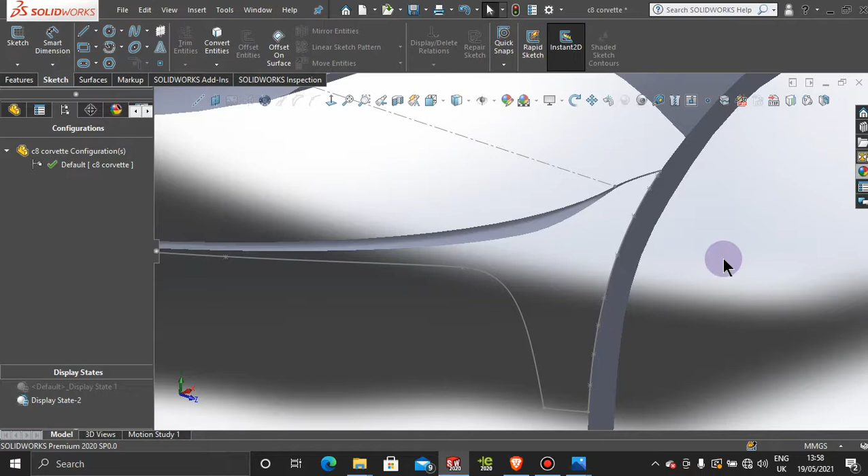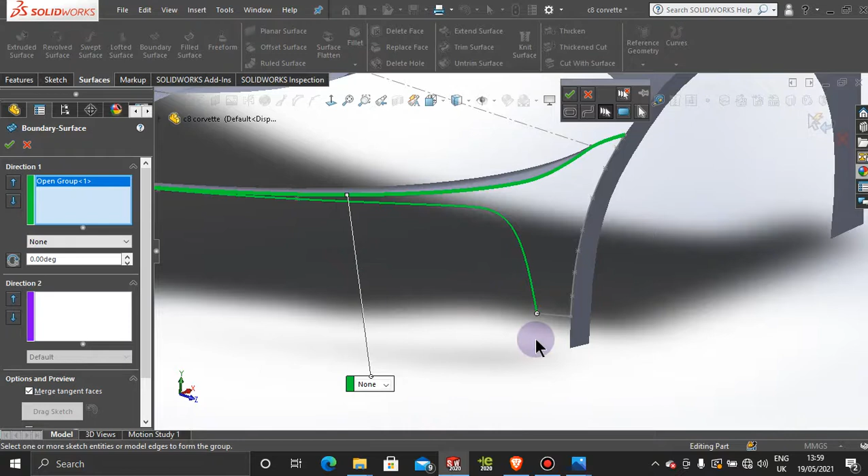Okay, so let's hide that, and then let's try to add our surface now. Let's try boundary surface. So surface, boundary surface, and let's choose this section here. Instead, let's try selection manager and select that edge all the way through to that edge there, and then press OK. And then selection manager, this edge and this edge here, and press OK. I'll wait for it to generate it.

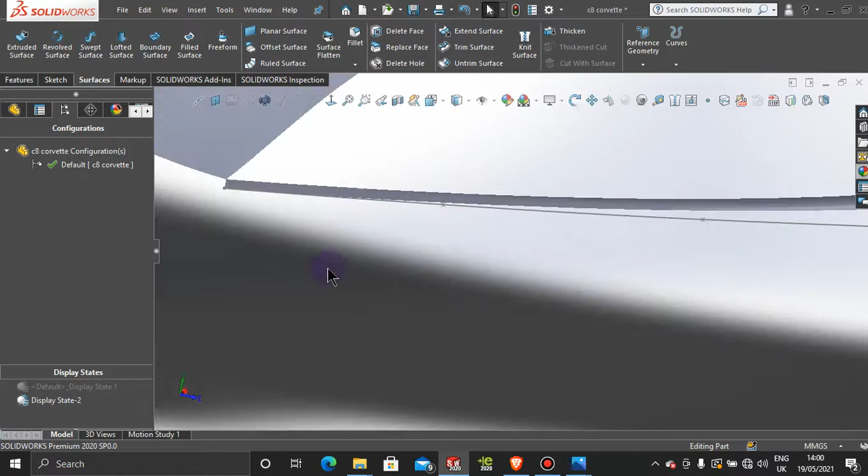Okay, and then for direction 2, we're going to use our 3D sketch. And let's have a look at our surface. Because it was self-intersecting geometry. All right. And so let's have a look at that for a second. So let's have a look at the self-intersecting geometry. It should be because of that line here.

So let's edit this sketch and come from the front plane. And then select the connectors here and just pull it down, and then pull it down so we have better. Okay, that's good. Exit the sketch, and then we'll look at this here. Okay, and then right.

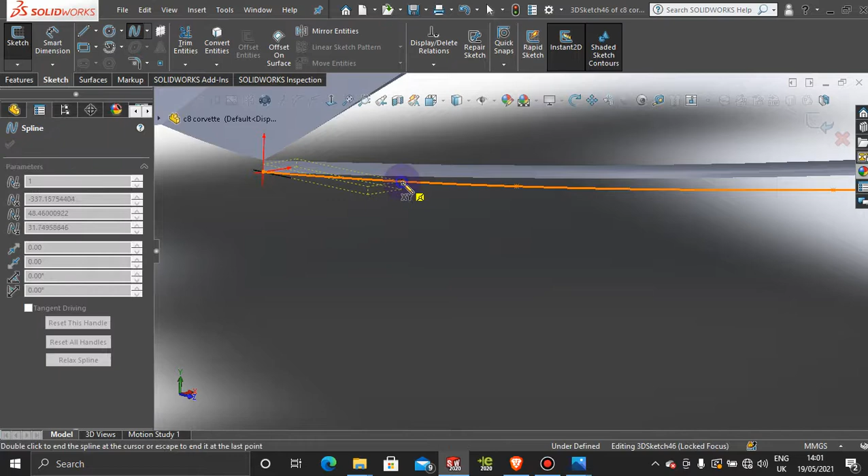So let's grab another 3D sketch here. 3D sketch, spline, and let's just make that sketch onto this sketch here. Try to make as much connections as you can at this point. And then to the corner there. Okay, that one stayed there.

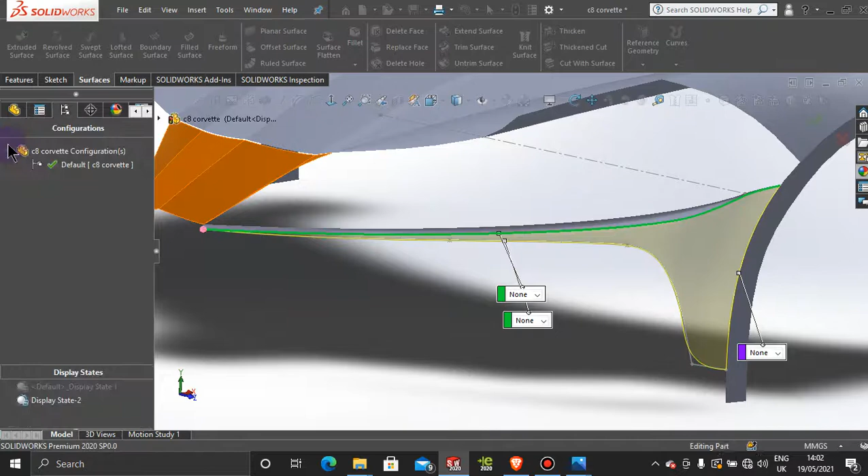So let's try our boundary surface now. Surface, boundary surface. So let's choose this edge, this sketch, and then selection manager. Let's choose this edge and continuing, and press OK. And for direction 2, we're going to choose this edge here. Okay, and press OK. And now we have our surface.

So it looks like we have a little bit of warpage there because of this going in a little bit too much. But we will deal with that in the next tutorial because this tutorial is already too long. So let's just mirror this over to the other end and see how it looks, and then in the next tutorial I'll fix up that issue.

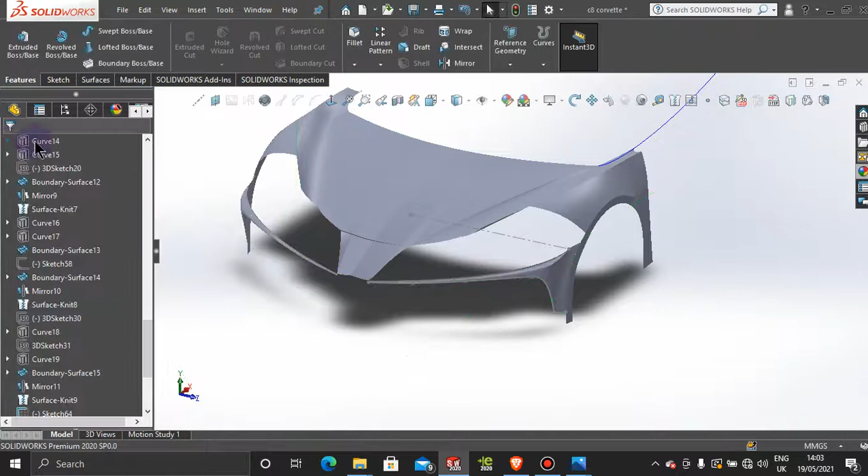So mirror that entity, and then front plane and bodies to mirror, and then this one as well, and then press OK. All right, so now we have some of the lower section of our Corvette C8. All right, so we leave it here, and I'll see you back in the next tutorial to fix up this area here, and then to come down all the way down to this corner. All right, so see you then.